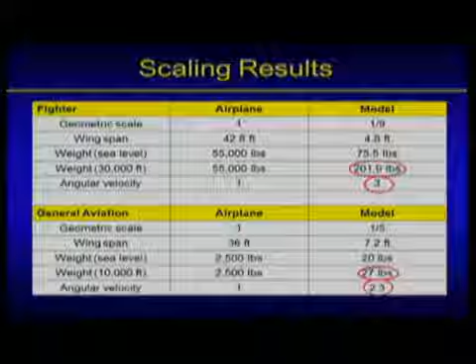The first is building this model to weigh this much and still be able to absorb the impacts and crashes that are going to occur. The second is the model moves so quickly that the piloting task may have to be divided up between one or more people, since one person perhaps can't control the model moving that fast. So with those thoughts behind us, basically it makes no sense to test a model claiming to simulate an airplane unless it does follow those scaling procedures.

Now let's talk a little bit about the things that drove Langley to begin these types of tests back in the 1920s. In World War I and immediately thereafter, the tailspin was a phenomenon that was unanticipated. It was deadly. The principles involved weren't very well understood, and no one really knew how to affect recovery once you got into a tailspin.

The situation was so bad in the 20s that the U.S. Navy had a series of aircraft that were really bad spinners. I want to show this video clip. This is a Boeing NB-1 observation biplane being spin tested, put into an intentional spin in 1922.

These tests were conducted by the Navy. Here the airplane is put into an intentional spin. The pilot wanted to go about 2 turns and then recover. Unfortunately, the airplane had other ideas, and it continues to spin for no less than about 30 turns before it hits the ground. The pilot did parachute to safety. Unfortunately, the film clip doesn't show him leaving the aircraft, but you can see the airplane basically locked into the spin. He's left the airplane by this time.

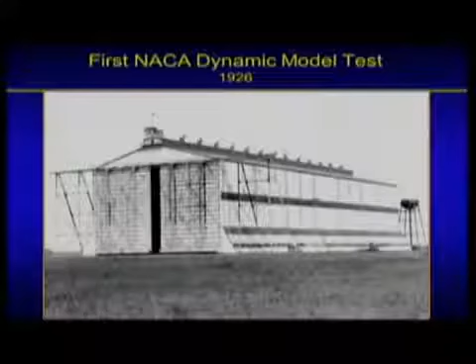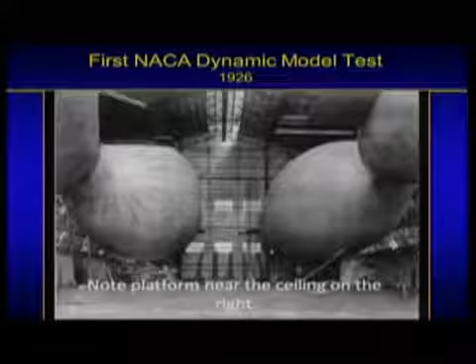Within the 100-foot high ceiling of this building, they were able to do the very first dynamic model test. I'm so glad we were able to preserve this film from 1926. Take a look at how this test went about. The testing technique was basically to climb to the ceiling of this building and then hand launch a model in a spinning condition, where it would be caught by people on the ground, kind of like the Keystone Cops. You see the platform up near the ceiling up here.

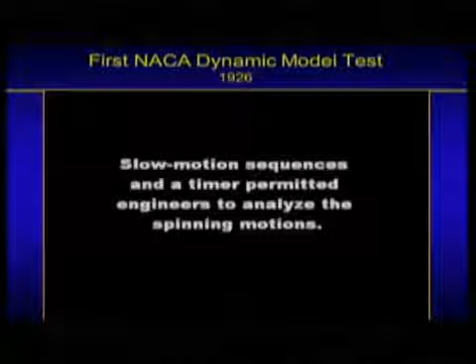The next scene shows the researchers changing the moments of inertia of the model by moving these mass weights along the rod. And then I guess they drew straws to figure out who had to climb to the top of the building, and maybe worse yet, who had to hold the net to catch the model. So here you see some launches of the model into the net, using slow motion pictures and a timer that let them analyze the spinning motions. But that was the very first test done for spinning here in the United States.

It didn't take very long for everybody to decide that dropping models was not a very effective way to do testing—I guess especially for the guy who had to climb the stairs, or maybe someone who got hit in the face by the falling model.

This work was followed by the international crowd. People in Britain actually copied this technique, using a big barn at the Royal Aircraft Establishment at Farnborough for similar testing. Unfortunately, the barn burned down, and the British decided there had to be a better way.

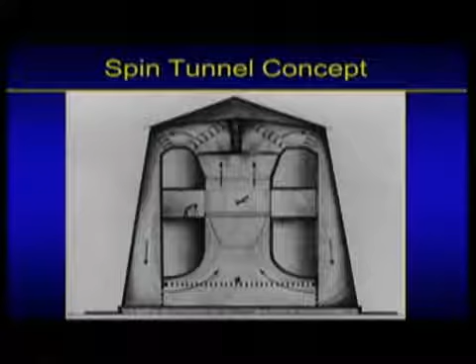So the Brits began to think of other concepts, and this led to the development of spin tunnels. The British actually got there first with the idea—rather than have the model fall through the air, have the air flow vertically and keep the model in equilibrium in front of an observer. They proceeded through some conceptual proof of concept testing.

This is a model of that proof of concept—a very small vertical spin tunnel. To give you an idea how small it is, here's one of the test models on the side. Nonetheless, it served as proof of concept for their version of a spin tunnel. The airflow was vertical, and they proved they could keep the model in equilibrium within the center of the test section.

Here at Langley, the word went out quickly: we want one of them. The person charged with building Langley a spin tunnel was Charles Zimmerman. Charlie Zimmerman was one of the most brilliant scientists to ever work for NACA and NASA. He was a proponent of vertical takeoff aircraft.

He invented the spin tunnel and a free flight tunnel, as you'll hear in a minute. When Project Mercury came along, he was one of the key figures in the space program plans. So Charlie Zimmerman was given the task of developing this 15-foot tunnel for Langley, basically a copy of what the British had put together.

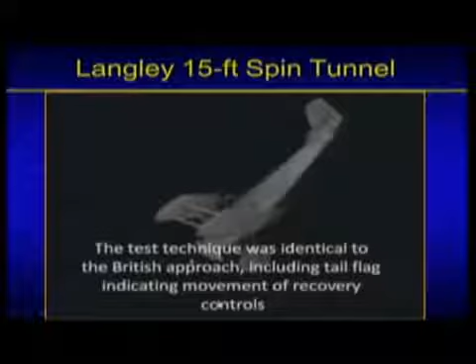It didn't take very long for the military to catch on to this, so in the between-war years you'll see things like the P-26, and then as we got into the early years of preparing for World War II, a number of aircraft that would become famous during the war were tested in this particular tunnel. Reports on those results got out quickly to the military long before the airplanes went into their programs. Virtually every military design, either prototype or on paper, was tested in this 15-foot spin tunnel.

However, when World War II started, there was a huge jump in the weight of military aircraft, such that this particular wind tunnel no longer had sufficient vertical velocity. So Langley was faced with the problem of designing a new tunnel. The 15-foot tunnel was located in this building. A new tunnel was built, the 20-foot spin tunnel, with a higher power source and higher velocity capabilities. At that point the 15-foot spin tunnel was dismantled, and the 20-foot tunnel became operational, and is still operational today.

The new tunnel came on board in 1941, and the next sequence will show pictures of testing. The test section was surrounded by a magnetic field, such that by tripping that field, the controls could be tripped on the model for recovery.

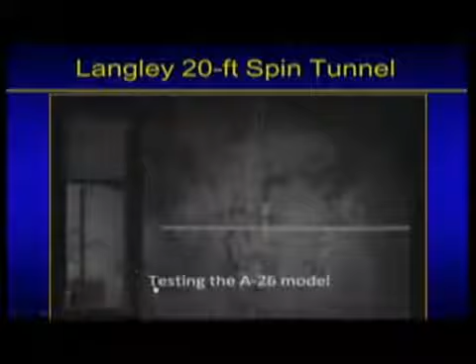I included this film sequence of the A-26 model just to show you that indeed there were a lot of women who worked out here in World War II. This rather attractive technician is launching the A-26 model.

At the end of the test, you can see she'll retrieve it using this pole with a tong on the end, just like the British did many years before.

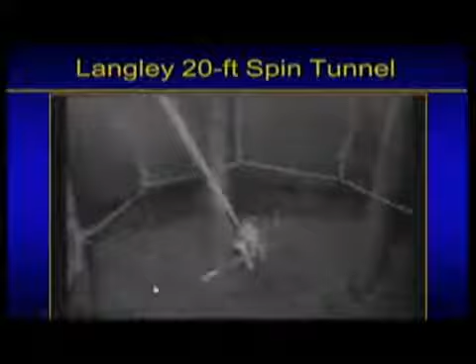Many times I've seen this film clip and wondered who her hairdresser or hairstylist was, because it was a long day at work for her.

Today, the 20-foot spin tunnel is still in operation, still serving the country for both aeronautics and space programs. The models have changed - the aircraft have gotten much heavier. This is a typical fiberglass balsa model, much heavier than the early biplane balsa models that were used. Rather than magnetic fields, hobby-type radio control gear is used to trip the controls for recovery attempts.

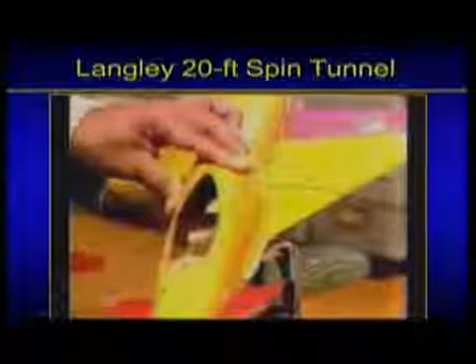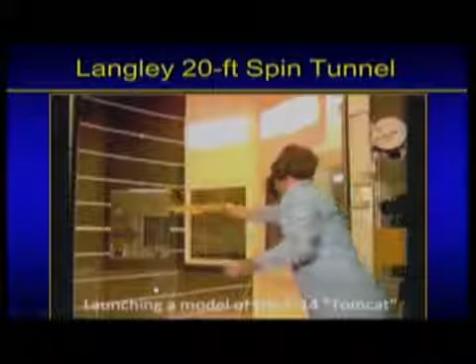The operation of the tunnel is very similar to what was done in the 30s. This is a launch of the F-14 Tomcat model into the vertically rising airstream, and the tunnel controller uses rapid accelerating airspeed control to keep the model in view while the motions are filmed, including the effects of recovery controls.

The 20-foot spin tunnel here at Langley has been in operation now for 72 years. Hard to believe, 72 years of service to the nation, not only as a facility, being there when it was needed, but also the expertise involved in manning such a facility.

Been a remarkable activity. Now, after Charlie Zimmerman invented his spin tunnel, he said, what's next? What's another neat thing to do? Why don't we invent a wind tunnel that will let us evaluate stability and control of aircraft in level flight rather than vertical flight? So Charlie pursued the idea of a free flight tunnel.

This was his proof of concept apparatus - kind of a neat idea. It's a wind tunnel with a propeller on the back, and the tunnel itself is mounted in a pivoting device which enabled the nose of the tunnel, the entrance cone, to be tilted downward. In this manner, they were able to tilt the tunnel nose downward, increase the airspeed, to the point where the model developed enough lift to take off and start flying, as it were in gliding flight.

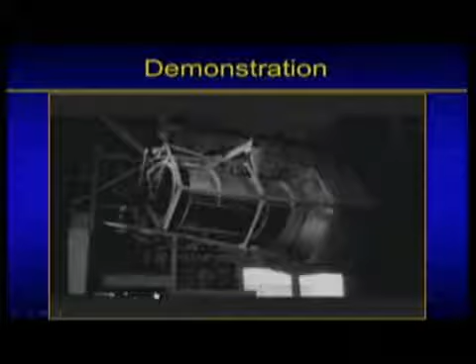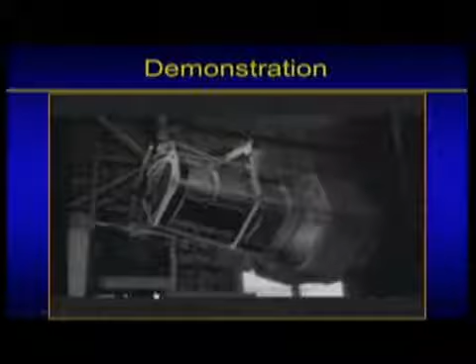This is Charlie Zimmerman getting ready to fly the model. There's another person behind the tunnel on the other side. The nose of the tunnel is tilted down, the airspeed is increased, and you'll see the model rise up and start flying with Charlie in control at the rear.

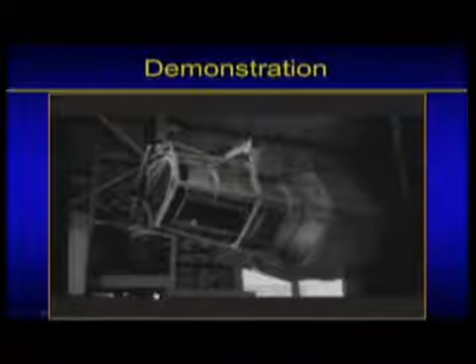This shows the operator on the left and Charlie on the right. Although it's hard to see, there's a very thin wire carrying control signals to the model as it flies in the tunnel.

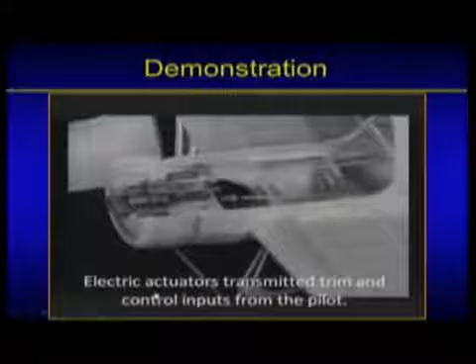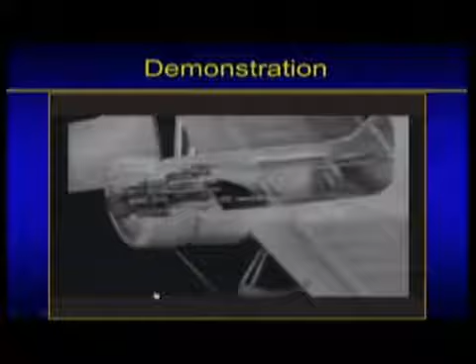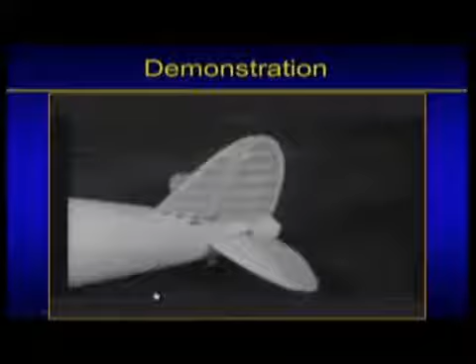Models in those days were very rudimentary. The control system was electromagnetic, with trimming devices that let them crank in a little bit of trim. As a result of this scaling dilemma I mentioned earlier, the controls used were full on or full off to combat the rapid motions of the model. So here's a typical control input that resulted in bang-bang type controls. You can also see the trimmer working on the elevator.

Charlie's proof of concept terribly impressed Langley management, and they gave him a green light to proceed with a new free flight tunnel, known as the Langley 12-foot free flight tunnel, in 1939. That wind tunnel was built in a sphere, not for vacuum purposes, but to enable the airflow to remain constant as the tunnel tilted up and down. Again, the propeller at the rear end, and as the air circulated back through the test section it could be tilted up and down. Here is the 12-foot free flight tunnel in action.

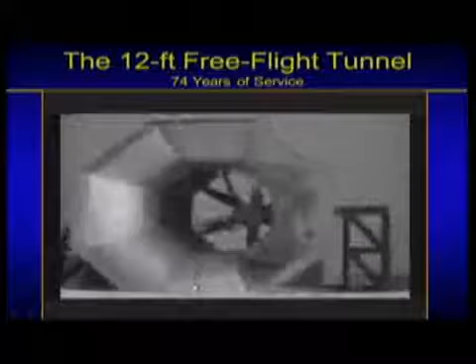This is the exterior view showing the sphere. It's over on the East Air Force side of the base today. This little scale model shows you how it was put together. If you look carefully, you can see a pilot's position right in front of the propeller there, and you can see the model depicted in flight within the test section.

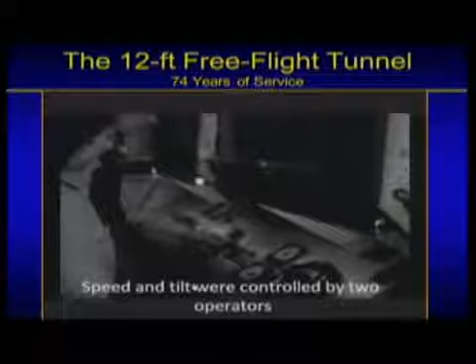They had both nose-up and nose-down tilt capability to be able to use powered models if they so desired. You see where the tunnel operator was positioned, and speed and tilt were controlled basically by two operators.

The pilot was situated in front of the tunnel fan in an enclosed cockpit where he could best look up at the model in flight.

This was the pilot's position, primarily used, again, full-on, full-off type controls.

The technicians here are readying a model of the McDonnell XP-88. You can see a fairly large model in that 12-foot test section, showing the control system on the model.

Jimmy Doolittle once toured this facility and said, 'This is the damnedest thing I've ever seen.' He couldn't believe that they were getting paid to do this.

Here's a typical sequence. The nose of the tunnel is being tilted downward. The airspeed is being increased. Wings produce enough lift to take off.

And you can see the head of the pilot down here beneath the canopy. Relatively good, stable flying airplane.

All through World War II, this tunnel was used heavily to evaluate unconventional airplanes, flying wings. A number of Jack Northrop's designs were tested here, as well as all of our first-line fighter-type aircraft.

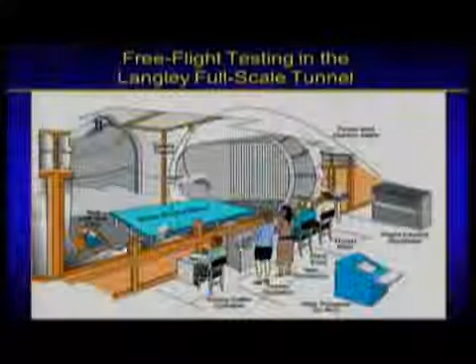The free flight technique kind of reached its maturity over to the full-scale wind tunnel. And in its most recent days, this shows a sketch of the test setup that was used in that facility. Again, the test section measured 60 feet across by 30 feet high.

This shows a typical model in flight, and the cable you see coming into the top of the model brings forth compressed air, which was used to power the model, and also control signals from the pilots as well as the flight control computer that simulated the flight control system.

Piloting duties were divided up. One person flew thrust, one pitch. The person flying roll and yaw was situated in the exit cone of the tunnel looking up the rear end of the model. And you can see that there was a safety cable operator whose job it was to pull the model out in the event of loss of control during the flight.

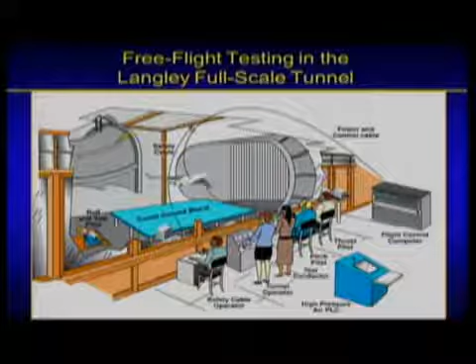During those years, the facility, as you'll see in some of our highlights, played a yeoman's job in the advancement of flight techniques. I want to show a typical flight.

This shows our moderator, Mr. Dan Murri, as well as Mark Croom in the audience, during some flight testing of the blended wing body configuration. This gives an idea what the last few tests, free flight tests, in the facility look like.

This was a large model. You can see the vane on the nose of the model being used for control feedback, and the sophistication of the flight testing.

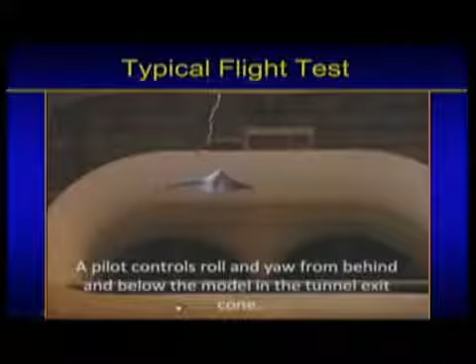The models, by the way, were not only flown, but they were also tested on the conventional sting to measure aerodynamic data, so it was possible to correlate flight motions with the aerodynamic parameters involved.

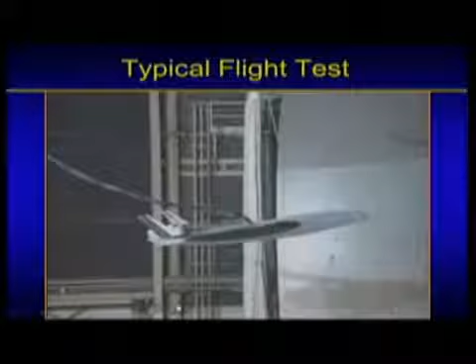Now, outdoor free flight techniques. The free flight wind tunnel techniques told us at the stall an airplane may go out of control. The spin tunnel, because the models were thrown in by hand, says there'll be a spin, but what's left out is can the airplane reach that spin mode from conventional flight.

And that holds true for quite a few airplanes. They can't be flown deeply enough to reach that spin. And more importantly, what do you tell the pilot to do to keep from reaching that endpoint? So Langley invented something called the outdoor free flight technique.

This gives a historical perspective of what was gone through. They started with catapult testing, trying to shoot the model off a catapult, pull the nose up and see what would happen beyond the stall into the incipient spin, but buildings were not tall enough. They couldn't get enough of the spin to get to the developed spin.

So in the 50s, they started doing testing using helicopters, unpowered models dropped from helicopters. Initially this was done at Patrick Henry, today's Patrick Henry Airport, and then it moved to West Point Airport. The model was dropped from a helicopter, and these ingenious guys used World War II anti-aircraft type gun platforms to track the model and fly the model.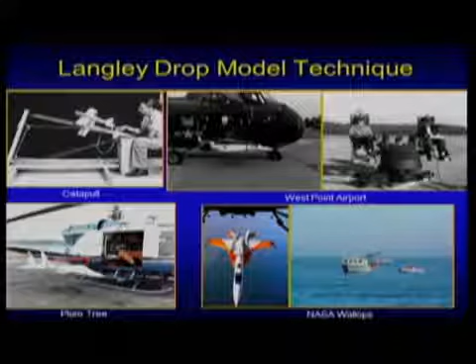Now I want to switch over and talk about my favorite selected applications, chosen because I think these are the most dramatic. There are going to be 7 areas we're going to talk about: spinning, parachute technology, a general aviation program, space capsule stability, para-wing tumbling, and then accident investigation.

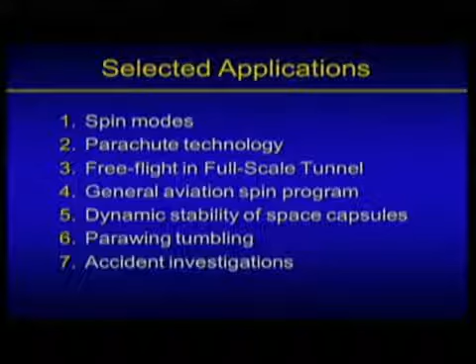So let's leap into these, the first being the spin mode story. I'm going to refer to flat spins and steep spins. By flat spin, I mean the airplane is spinning with its fuselage almost horizontal. That is, it's descending vertically, the fuselage is almost horizontal, almost flat. Very difficult spin to recover from because the rudder, which would usually terminate a spin, is basically parallel to the airflow.

So it's pretty ineffective once you get into that type of spin. Also, as the airplane spins flat, it tends to rotate about the center of gravity. For some aircraft, and you'll see an example later when I talk about an accident, if the cockpit is very far forward, you'll get an effect similar to a merry-go-round where the cockpit is subjected to very high G-forces, eyeballs out, while you're in a very high rate of spin in a flat attitude. Let's take a look at some of these spin modes. I want to show you various spins that can be demonstrated by the same airplane. Just depends on how they get there.

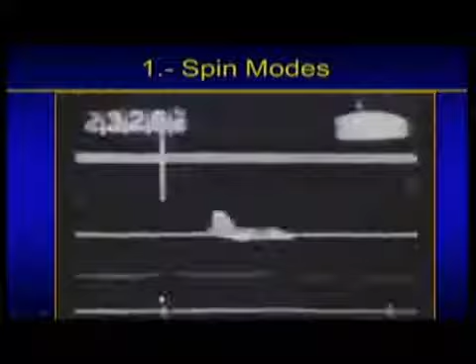So the first one we're going to show you is this flat spin of the F4. You can see the airplane spinning very flat, very difficult to recover from. In fact, the F4 does not recover from this particular spin. It's not the only airplane with that problem. This was an F-111. And then on top of that, here's some other spins that the same airplanes exhibit.

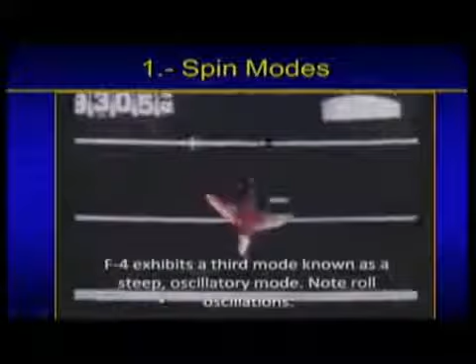This is a second spin that the F4 has. It's a steep spin. You can see that the spin axis is actually off the nose of the airplane, spinning about an axis somewhere off here, completely different than the flat spin. The F4 also has a third spin mode, just to further confuse the pilot, which is called the oscillatory steep spin. You can see the hesitations and roll here, which ought to be thoroughly disorienting to a pilot.

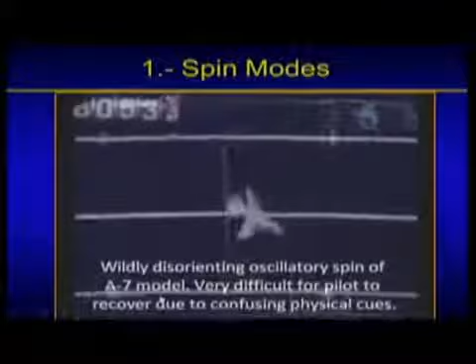Not to be outdone, the F-111 has an oscillatory spin. And then here's my favorite of all time in terms of disorienting spins: the A-7 fighter. And if you can recover from that, you're one hell of a pilot. So one of the features of our testing in the facility is to identify these different types of spins, make sure the pilots are aware, before they ever go up to spin test the first airplane, of what they might run into.

Second area I want to talk about is parachute technology. The staff at the spin tunnel has expertise not only in the minimum size parachute you have to put on an airplane to recover it from a spin without aerodynamic effectiveness, but also in the mechanics of getting the parachute out, and equally important, letting the parachute go once you've recovered. That's pretty important too. So they've developed that technology.

The problem isn't quite as simple as it might seem. For example, just the effect of the riser line length up to the parachute matters. If you design the parachute correctly, it will inflate, give a retarding moment in yawing, and stop the spin. The nose of the airplane will come down and you can recover to conventional flight.

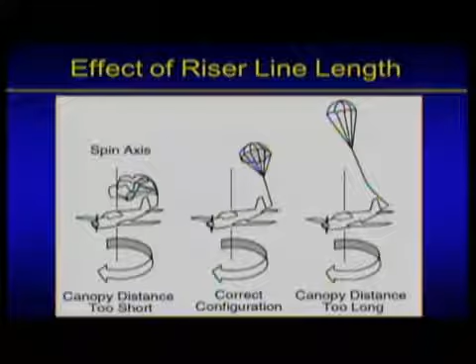If the riser length is too short, the dead air over the airplane as it's descending in a spin will suck that parachute in, and it will just flop over the airplane and have no effect on the spin. Likewise, if the riser length is too long, the parachute will drift over to the spin axis and gaily spin around with the airplane.

So let me show you some movies now that show the effects of these spinning motions.

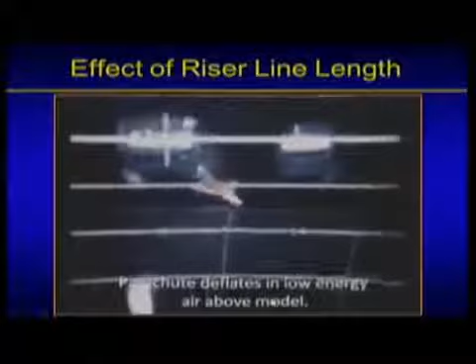Here's an F4 whose spin chute riser line is too short. You can see the parachute dropping back into the dead air. And if you want to make an F-14 pilot mad, just put a parachute on his airplane that's going to collapse and lay on top of the airplane while he's trying to recover from a spin. This is about as bad as it gets.

Here's one with a riser line that's too long. The parachute comes out, it inflates, and then it drifts over to the spin axis, as if to say, this is fun. And in the meantime, the pilot can't recover from the spin.

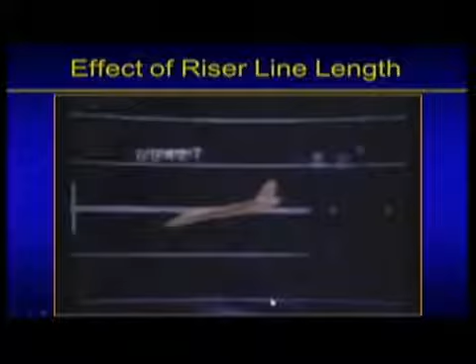Switching subjects again, I want to talk about free flight testing in the full-scale tunnel. There were so many, as you can imagine, 50 years of free flight testing over at that tunnel. So many things I could have picked, but I wanted to highlight a few of these.

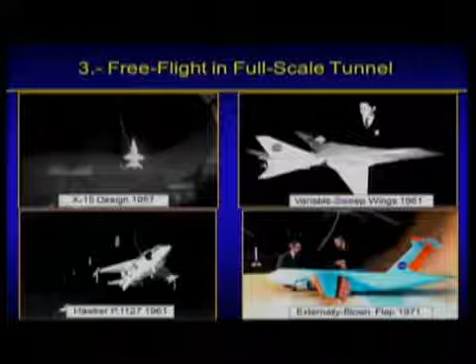Upper left, the X-15. When they were designing the X-15, a major question came about the wing design: were we going to need ailerons or not? The people here at Langley had come up with the idea of using a differentially deflected horizontal tail for roll control, and were adamant that ailerons weren't needed, since there would be a huge design problem with heating, actuators, and so on, on the wing of that airplane. So it all came down to the actual X-15 design crew coming to Langley to observe free flight tests in the full-scale tunnel, where it was demonstrated that the airplane could be controlled with a differential tail. And that's the way the airplane was built. The X-15, next time you're up at the Smithsonian, you'll note it has wing trailing edge flaps, but no ailerons on the wing.

At the upper right, variable sweep wings, when they were first invented, again here at Langley - this is a Langley conceived concept. Models were flown in full scale to show that the trim and flying behavior of the airplane would be satisfactory.

At the lower left, the Hawker P-1127, which was the daddy of the current day Marine Corps AV-8 vertical takeoff and landing airplane. The U.S. and the British engaged in common research. The British government was not going to fund this project - they felt it was too complicated and that the airplane could never transition from hovering flight to forward flight. Free flight tests in the full-scale tunnel here at Langley convinced them otherwise, and they gave a green light to the project, which led to the P-1127 and the AV-8s as well.

And then finally, at the lower right, a very nifty idea, again invented here at Langley: the externally blown flap. The idea being to tilt the forward part of the engine nacelles downward - these being fan-powered engines with relatively cool exhaust - and direct the fan flow up over huge trailing edge flaps to generate very high values of lift for takeoff and landing, also placing the horizontal tail up high to avoid all of that downwash coming from that flow. If you look at that airplane, you can see this was 1971. Today you go out and look at the Air Force inventory, and you see the C-17 basically embodied a lot of the research that came out of those tests.

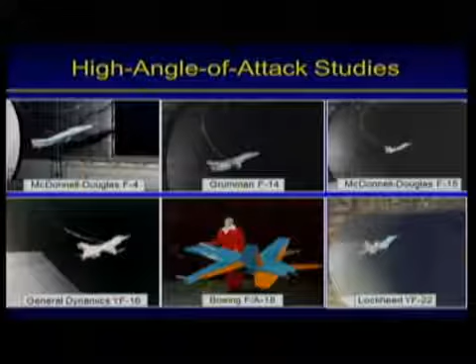In the 70s, virtually every new fighter aircraft was sent to Langley for testing in full scale before it ever entered this test regime in full flight. You can see that a number of these configurations benefited from those tests, and again, this is covered in detail in the book.

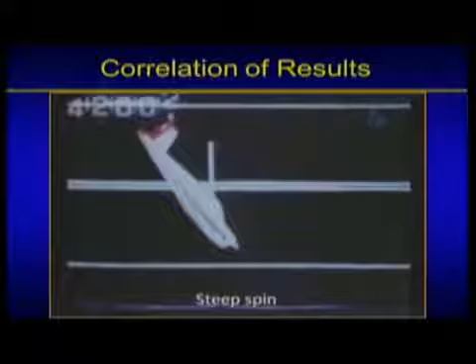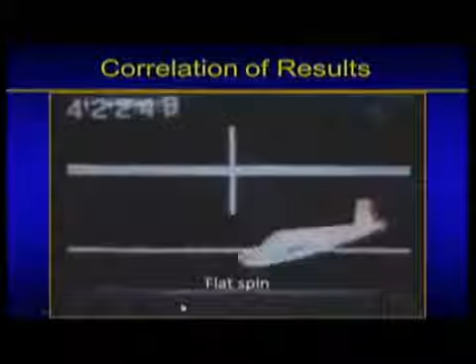This is in the spin tunnel. It shows that this airplane has a very, very steep spin, very easy to recover from. It took about 1 1/4 turns to recover, but it also had a flat spin with absolutely no recovery, just as bad as a fighter airplane. So we have those two spin modes.

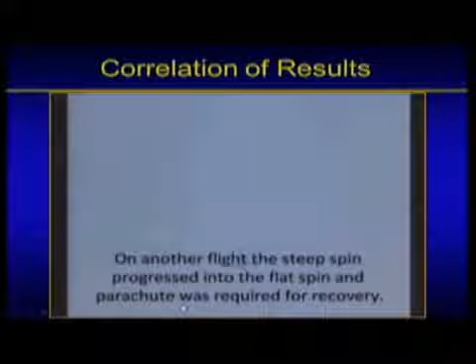Now on another flight, we got into the steep spin, but as we stayed in the spin, this progressed into the flat spin. You'll see here after several turns, the spin becomes noticeably faster. The nose of the model rises up, and from that point on, the pilot is flailing the control stick trying to recover, and nothing's happening.

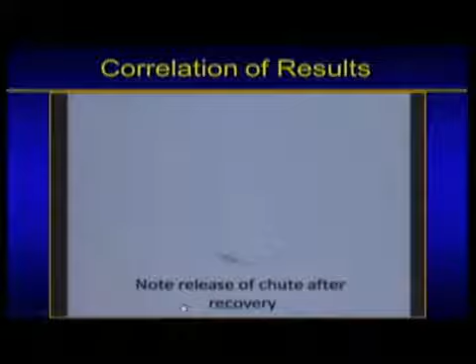The model, of course, was equipped with a spin parachute for emergency recoveries. You can see it's in the flat spin now, and absolutely nothing is working to recover. The pilot releases the parachute, terminating the spin, here at the end of the flight.

So basically, the radio control model and spin tunnel model agreed quite well. Now let's take a look at the airplane. These tests were done up at Wallops. This is Jim Patton, who was our test pilot at the time. Jim flew all of our spin tests on this particular airplane.

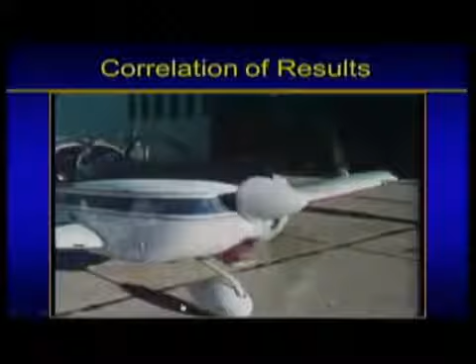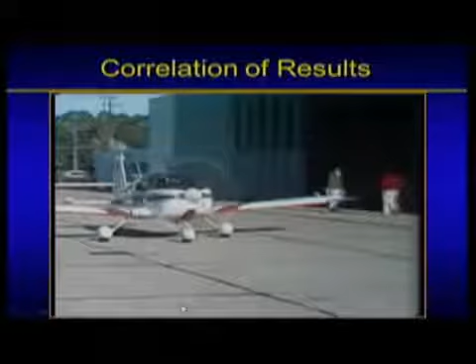The airplane itself, let me see if I can pause the picture. If you notice carefully, on the wingtips of the airplane, there was a movie camera embedded within the wing structure that used a mirror system to photograph back and look at tufts attached to the wing, and also what the pilot was doing, for additional information during the flight. We'll look at some of those in a minute.

The tests were done at Wallops, as I say, with quite a bit of instrumentation. The airplane was flown up to an altitude of 10,000 feet, where Jim put the airplane intentionally into spins.

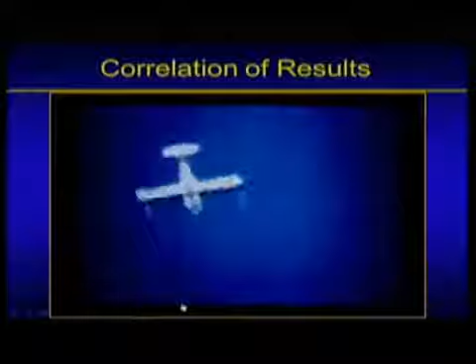So here at 10,000 feet, Jim stalls the airplane. You can see the propeller begin to slow down, pulls the angle of attack up. The wing does a dipsy-do, and Jim kicks in pro-spin controls. As was the case for the radio-controlled airplane, it goes into this steep spin mode, which is easily recovered. Jim is still holding pro-spin controls, and here's anti-spin controls, and you can see the airplane recover quickly.

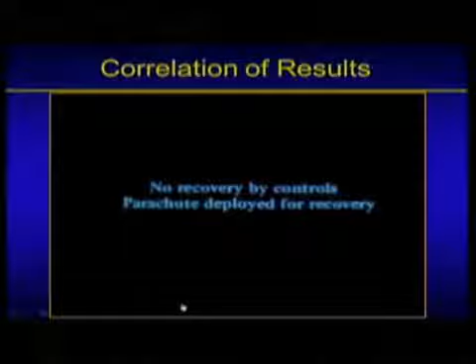Here, Jim flies into the flat spin, and as was the case for the radio control model, not going to be a good day without a parachute. He puts the airplane into a spin to the left, and within a few turns, you can see this spin get noticeably faster. The nose of the airplane comes up. Jim is putting in recovery controls to no avail. The airplane spinning gaily away. He's trying different control manipulations at this point.

And finally, he decides he's earned his civil service pay, so he deploys the parachute and releases it to come home.

I'd like to show you pictures taken from the left wing camera. You can see the black tufts on top of the wing. This is before stall, so the flow is attached, and you can see Jim in the cockpit. Watch what happens to the tufts once the airplane is stalled. Here he pulls the nose up, the wing stalls, and you can see the tufts saying, what happened to the air? Here's his first turn of the spin. The airflow over the wing is completely disrupted at this point.

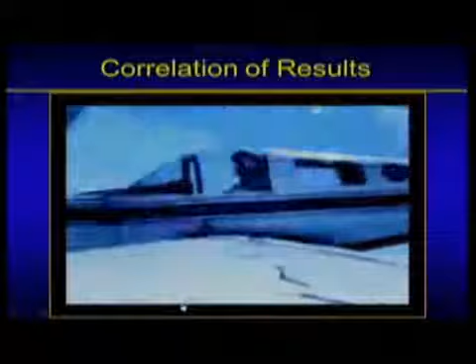Now Jim's going to go through his recovery procedure repertoire. Here's one attempt, nothing happening. At one point we told Jim to take his hands off the control—he's not praying there, he just took his hands off the control. Nothing happened. So Jim tried a few more things, pumping the stick back and forth.

Seeing terra firma coming up, he decides to pull the spin chute and get out of there. Watch the tufts reattach quickly. There we go, we're flying again now. He releases the chute from that point.

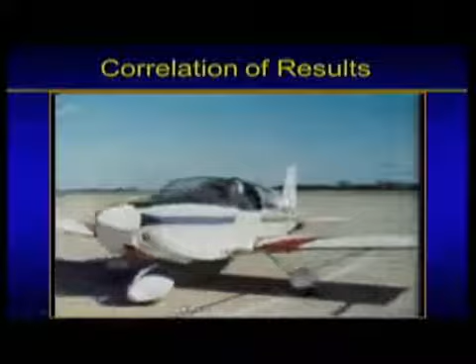These were obviously hazardous type tests. You can see the marks on the side of the cockpit for the number of times Jim used that parachute—actually 16 times. These pictures were taken a little early, but the chute was successful 16 times in terminating that spin. Quite a remarkable comment on the expertise of the people involved in that work. Bottom line, the correlation between all the tests was very good.

Now let's turn from airplanes to spacecraft for a minute. It wasn't very long into the Mercury project that people found out things with blunt bottoms don't fly very well during re-entry and recovery. The spin tunnel was the site of a number of tests for Project Mercury, Gemini, Apollo, and also some more recent bodies for testing, and some of these instabilities are quite remarkable. This movie will show you, both for Mercury and Apollo, the kind of instabilities encountered.

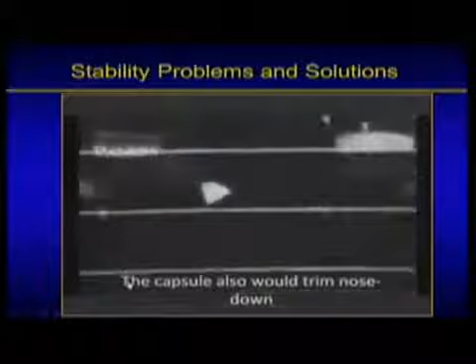For Apollo, the capsule showed instability in flight. It would trim nose down. So the issue here was how to attach parachutes to keep these rascals under control during recovery.

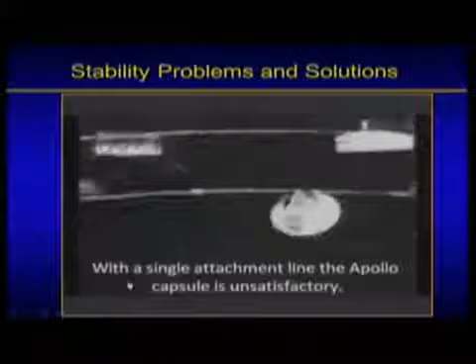They tried a number of attachment points. The first was a single attachment point. As you can see, this didn't work very well—the capsule still had wild oscillations. Finally, when they used multiple bridles, you can see it stabilized the capsule quite well.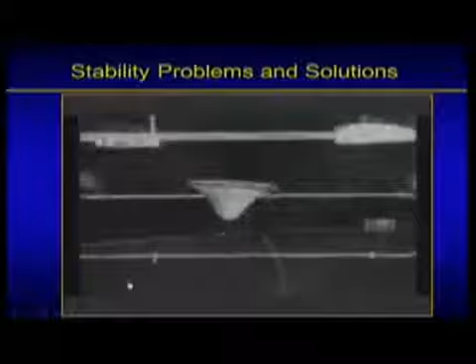Here's a quick clip of some of the activity that went on under the Constellation banner, showing the capsule escape tower first, and a second scene showing the Orion capsule stabilized with parachutes.

The next topic, number 6 out of 7, is the NASA Parawing research that occurred here back in the 60s and 70s. Parawing was invented by Francis Rogallo, a scientist here at Langley. His applications ranged from providing additional lift with a stowable, flexible wing for high-performance aircraft landing and takeoff, to rapid deployment utility vehicles, and enhancing cross-range capability for spacecraft.

None of those really worked out, except if you go down to Nag's Head, you'll see these all over the place for recreational vehicles.

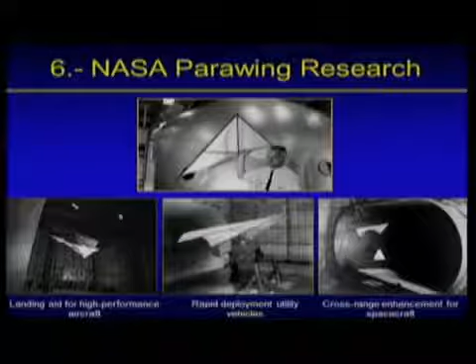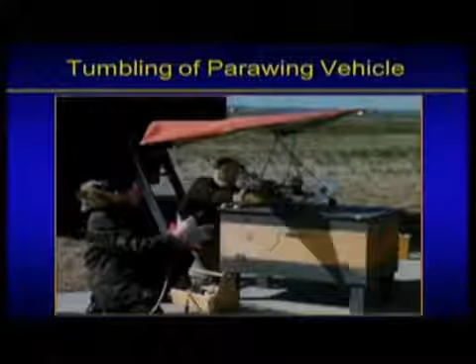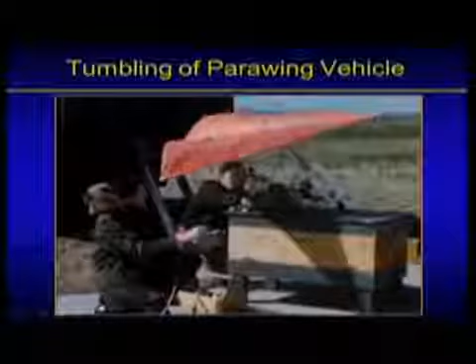I want to show you some research done here that was extremely significant for Parawing vehicle design, having to do with the fact that depending on center of gravity location, these vehicles can tumble. This is a propeller-powered utility Parawing vehicle. You can see they're checking the model out, giving nose down control, now right roll control, and so forth, checking it out prior to flight.

They'll demonstrate flights in which there was satisfactory stall recovery, and then tumbling occurring in flight.

The first two shots are going to show satisfactory stalls and recoveries. This is kind of a climb to zero airspeed hammerhead type stall. You can see the nose coming down. There's some luffing of the material as it reaches zero angle of attack, but the vehicle is recovered. A second flight, again showing satisfactory recovery.

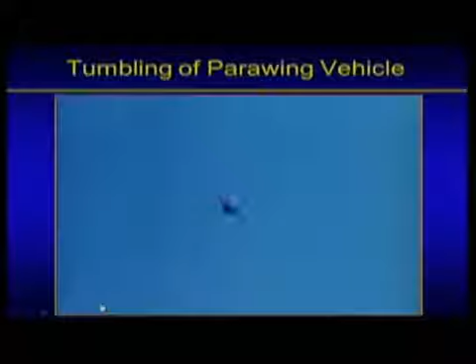Following this flight, the researchers moved the center of gravity back to assess what would happen at a rearward CG for this particular airplane. As you can see in the next two sequences, the stall recoveries involve tumbling, which is a very bad day. Here the airplane is flown to 0 speed, and in the recovery process, you can see it goes nose over tail tumbling. Just enough energy to keep it tumbling, and no control to recover the vehicle.

One more shot, just showing again a 0 airspeed stall, nose down for recovery, luffing of the material, and rapid tumbling. Very useful information for the parawing community, and they did quite a bit of traveling here to Langley to witness these types of tests. I have one more application I want to talk about.

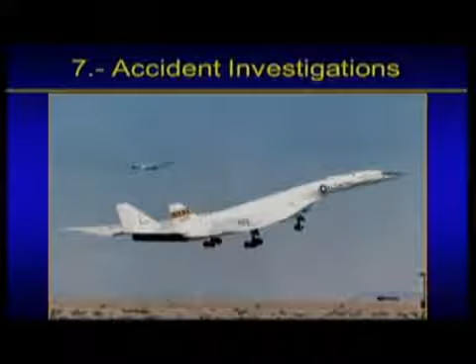It involves accident investigations and perhaps one of the most beautiful airplanes ever designed, the XB-70. This was Ship 1. There were 2 XB-70s built. The airplane was involved in a fatal accident. Ship 2 was out at Edwards Air Force Base back in 1966. The airplane had just completed a supersonic run for sonic boom studies for NASA, and General Electric requested formation flight time of aircraft powered by General Electric engines. So as you can see here, it was formatted with T-38 F4, a NASA F-104, and an F-5.

The F-104 NASA airplane was being flown by Joe Walker, who was NASA's leading X-15 pilot. The B-70 was being flown by Al White, a test pilot from North American, and Carl Cross, a major from the Air Force who was on his first familiarization flight with the airplane.

During the flight, the F-104 collided with the XB-70. The Accident Investigation Board said that Joe Walker lost sight of the downturned wingtip of the XB-70. The horizontal tail of his airplane impacted the tip of the wing of the XB-70, and in doing so, the F-104 rolled over into the vertical tails of the XB-70, which cut the F-104 in half. Walker died instantly. Both tails were sheared off the XB-70, and the left wing panel was damaged. I'll show you sequences from that crash.

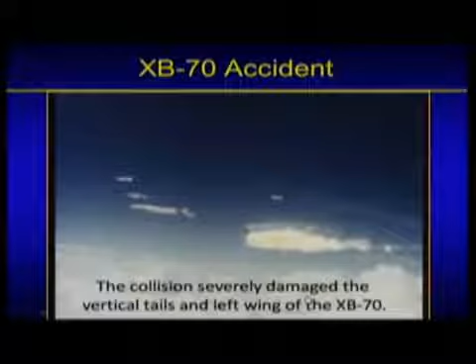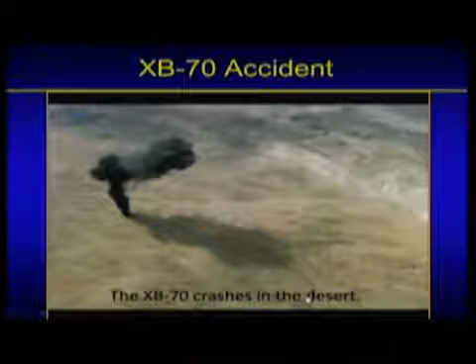Here you see the airplane after it's crashed into the B-70. You'll notice the vertical tails have been sheared off. The B-70, after 15 seconds of flying normally, fell away. You can see the left wingtip has been sheared off the airplane. It entered a flat spin. Now, before it entered that flat spin, Al White was able to eject from the airplane in a capsule. Both pilots had capsules that they could eject in. But the ejection sequence was such that the seat of the airplane had to be moved rearward before the capsule could be closed.

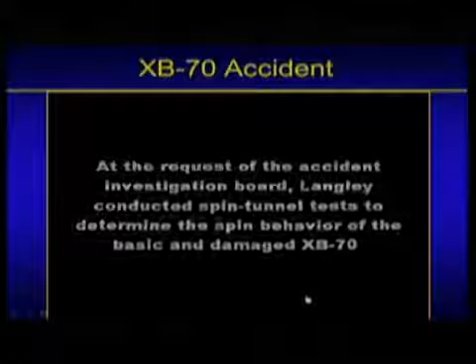The accident board requested that Langley do spin tunnel tests to evaluate the loads at the cockpit area during the B-70's crash. This was the basic B-70. Two things I'd like you to note: one is the relatively slow spin rate, projected at full-scale speed, and the fact that the airplane is spinning off its nose, so there's not much of a load at the cockpit. We're going to contrast that in a minute with the airplane in a damaged state.

You'll note the flatter attitude and the fast rate of spin, twice that of the basic airplane. The XB-70 was laid out such that you see it spinning about its center of gravity. The cockpit of the XB-70 is 100 feet forward of that spin axis. Estimates were that the cockpit loads were about 4.5 Gs forward during that motion. The wreckage, when it was found, indicated that the system that was a gas generator meant to move the seat rearward had in fact failed. It had not been designed for that level of Gs. So that really caused the fatality.

The accident board was very grateful for Langley's test to support their conclusions.

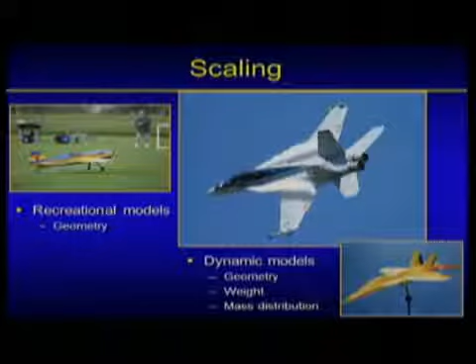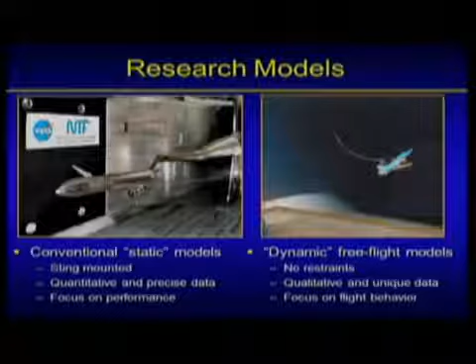An outstanding civil servant for his management of NASA's stall spin research for military and civil aircraft, he is the author of over 50 technical papers and 8 books on aeronautics topics. Joe earned a BS degree from Georgia Tech and an MS degree from Virginia Tech. I've known Joe for over 30 years—I was a co-op student, and he hired me as a fresh-out engineer in 1981.

He's been my branch head and my division chief. I have to tell you, basically a rite of passage in that organization was when a new engineer had to give a paper to Joe for him to review, or get up and rehearse a technical talk for Joe and get his feedback before giving an AIAA paper. It could be a very uncomfortable experience, but it was very effective, and you were always much better for going through it.

The reason was that Joe has an outstanding ability to see the big picture, to understand what's important, and to convey that message to his audience. He has definitely left an imprint here at NASA Langley, and numerous engineers here have Joe to thank for mentoring them. So Joe, I'm looking forward to your presentation this afternoon, and I may turn the tables on you a little, and give you some pointers when you're done.